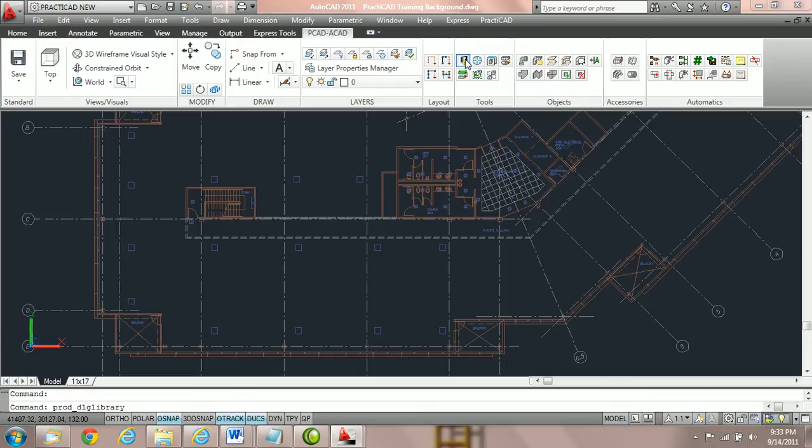Make sure you go into the ductwork options and let's check all the same boxes. For options, we should make sure check in-out attachment is checked. It's recommended that this is always checked. Allow incompatible connectors - it's recommended that this is always unchecked, so currently uncheck it. For duct line placement, it's recommended to have everything checked as we do here.

Size read only is up to you. To start, let's put our duct line editing options on change duct to transition, keep duct size at turn. I've got keep duct size at transition unchecked, and very important, specification by geometry is checked. Though the first three are preferences, this one I think should be checked all the time.

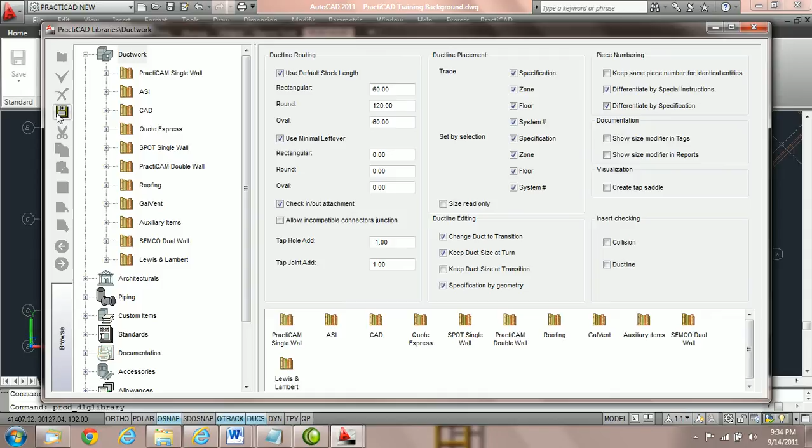Once you've got everything all together, if you've made any changes, you'll see the save key pop up. Click save and then exit out of your library.

Now we're going to zoom into this section of the drawing, and let's focus on this quadrant right here.

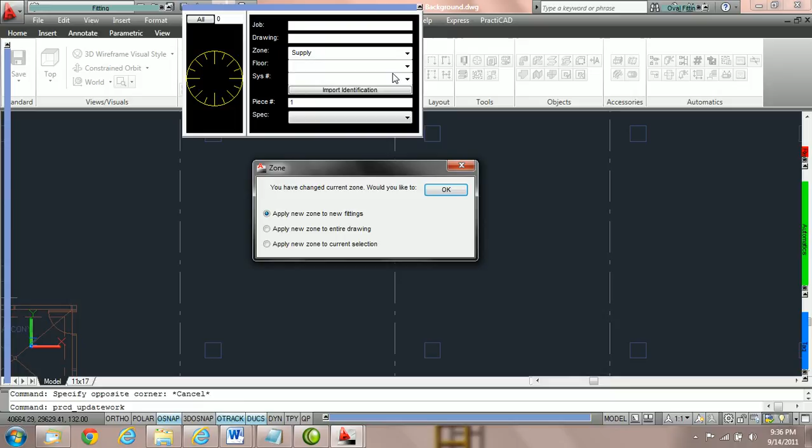Now first go into your workbox and choose a zone. We're going to choose a zone supply, and then we're going to choose a specification. I'm going to choose 2-inch water gauge. Remember that your specifications and zones might be different than that of this tutorial. So as long as you have 2 in the drop down menu, you should be fine.

For this exercise, I'm going to grab 2-inch water gauge and say apply to new fittings.

Now we need to go into the fitting box and grab a piece of rectangular duct. You should see the specifications, if you have them, already applied. We're going to go into Width In and choose 48 by 24, and then let's give it a height, 10-foot bottom, and hit enter.

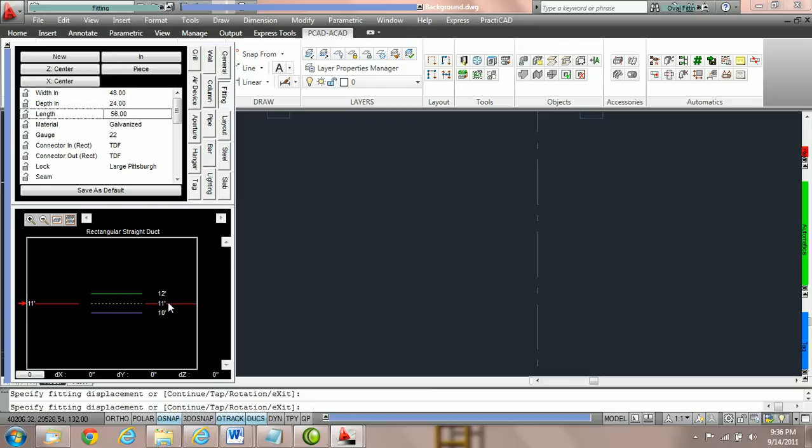Now we're going to place the duct on the drawing. Click once to start your rotation. Might help to have polar on. I'm going to turn polar tracking on. Click a second time to accept rotation, and then you should see the routing methods. The last thing you see before you're one click away are the routing methods.

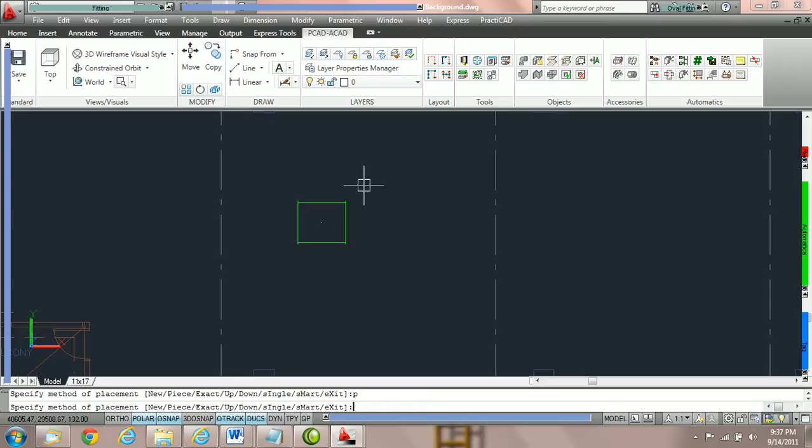So I'm going to click one more time. I'm currently routing with piece to put one piece on the drawing. So you could also hit P, spacebar to route with piece, and then click once, and your fitting should be on the drawing.

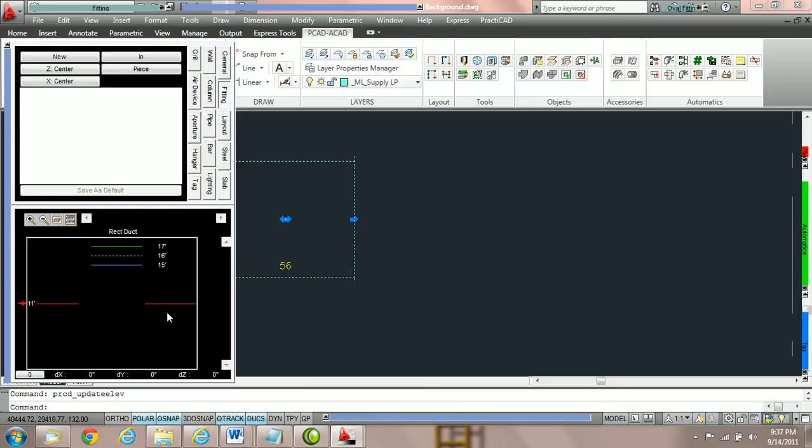Now first, to change the elevation of the entity, what we're going to do is just click on the entity, go over to your elevation box, and just change it to 15 foot, hit enter, and you would have successfully changed the elevation of that one entity.

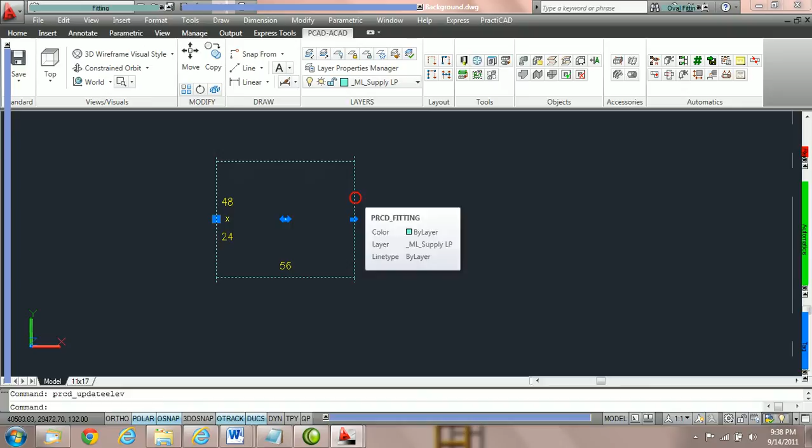Now we're going to edit the duct in 2 ways. We can either do it from the edit fitting window, or we can do it from the AutoCAD property box. So let's do it from the AutoCAD property box. To start, either double click on your fitting - I'm going to do that now - or you can right click and go to properties, and that'll open up your AutoCAD property box.

Here, let's just change the geometry parameter. Change the width in to 36 and the depth in to 18.

Now what we're going to do is go over to the fitting, and we're going to make changes to the connectors, but let's do this using the edit fitting option. Right click on the fitting after it's selected and go to your edit fitting option and check it. A little window should open up.

I'm going to put my fitting in Southwest isometric view by clicking right here. And you should have all your parameters unlocked.

Let's take the connector out and switch it from TDF to slip and drive. On my computer it says S&D. Your data might be different, but let's just change the connector out to slip and drive.

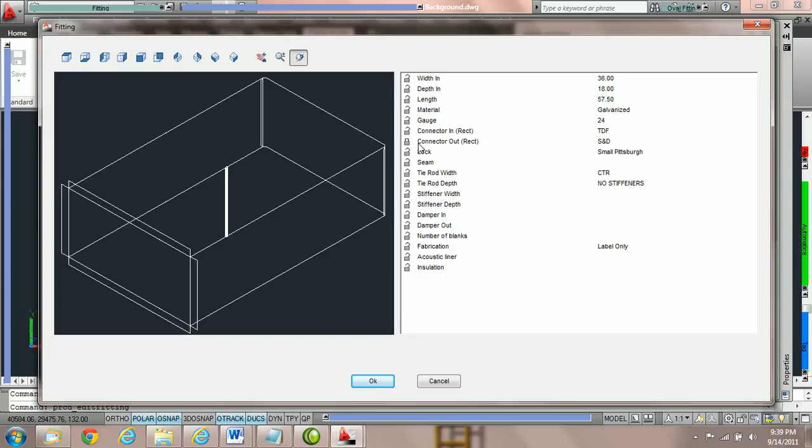And let's lock down that parameter, just that one parameter. And once you've done that, let's press OK.

Now, go into your AutoCAD property box and try to change that connector from S&D back to what it was. I'm going to try to change it back to TDF. If you do it, you should see that it is impossible to change that connection.

If we want to change that connection now, we need to go back into Edit Fitting. So once you've tried to change it and you've been unsuccessful, let's right-click on that fitting again and go into Edit Fitting.

And then let's click on that connector, the connector out, and change it back to TDF or whatever connector you had it at first. And then press OK.

As you can see, editing the fitting is very easy. Locking connections is also a very useful and easy feature to use. An area you might want to use edit fitting would be if you need to change a connection for some reason and you think you might edit the fitting later and you don't want that connection to change back.

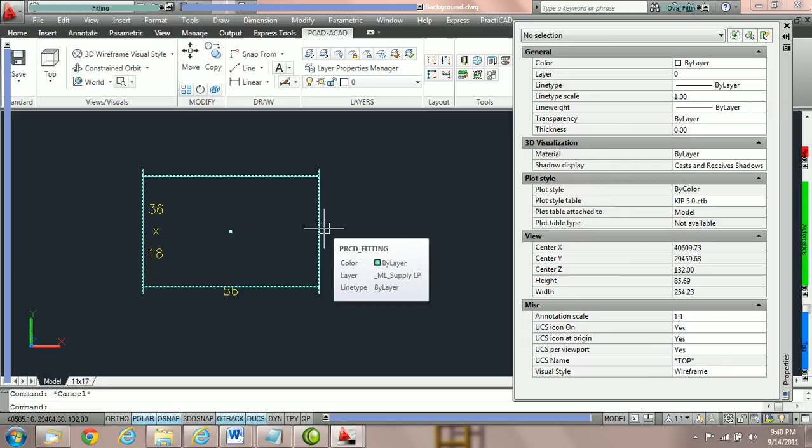For example, let's go through an exercise where we're going to grab another piece of rectangular duct out of your fitting bin and then hit C spacebar for continue and place it on the drawing by clicking once, and then I'm going to hit escape to let go of the fitting.

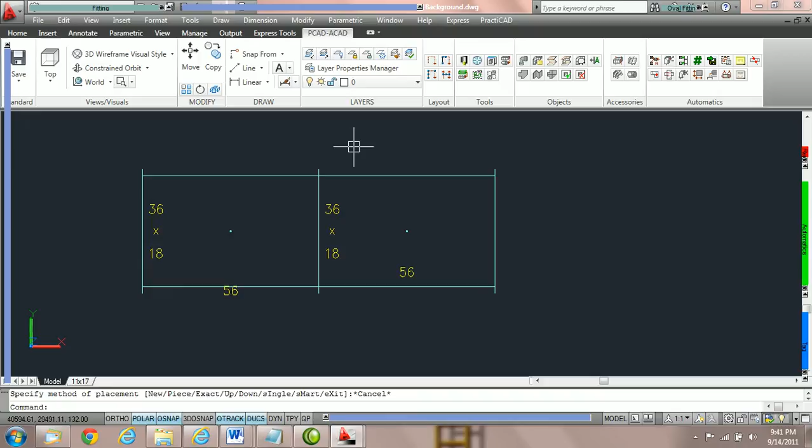Now let's click on the first fitting and double click for the AutoCAD property box. Change the connection out to slip and drive, or some connector that you've got in your data. Once you do that, you should see that PractiCAD will change the other connector to match.

This is all about compatible connectors, and there are separate tutorials on that, as well as the option that doesn't allow us to attach connectors that are not compatible. So that's why we changed that for this exercise.

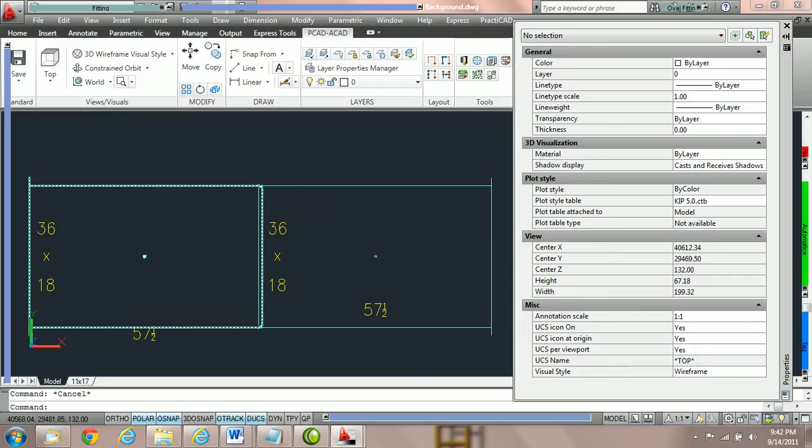Now, if we knew that we would want to hold these connections to slip and drive, even if we go to edit the duct later, we'd want to lock down these parameters. Currently, click on the first duct on the left and change the parameter to 42 and hit enter.

When you do that, notice that PractiCAD has now reapplied the specifications that are active, and it's probably added a TDF connector back onto your fitting.

So what we're going to do is reapply specifications, but with the connector locked. Change that connector on the out back to slip and drive.

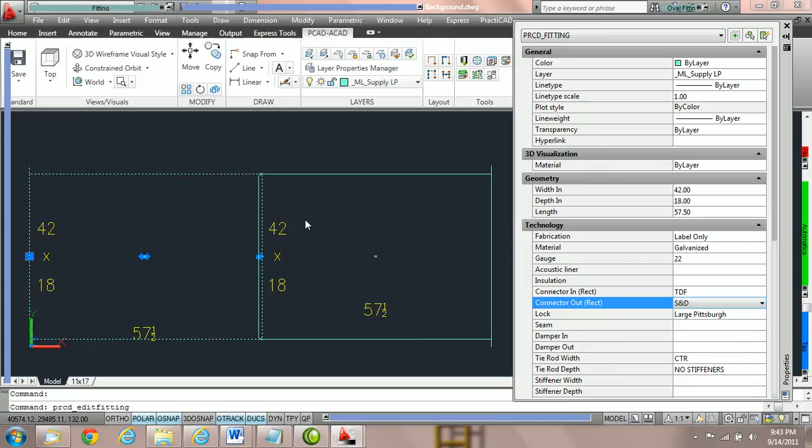Once you've done that, right click on that fitting and go to edit fitting. Let's lock the connector out down. And then press OK.

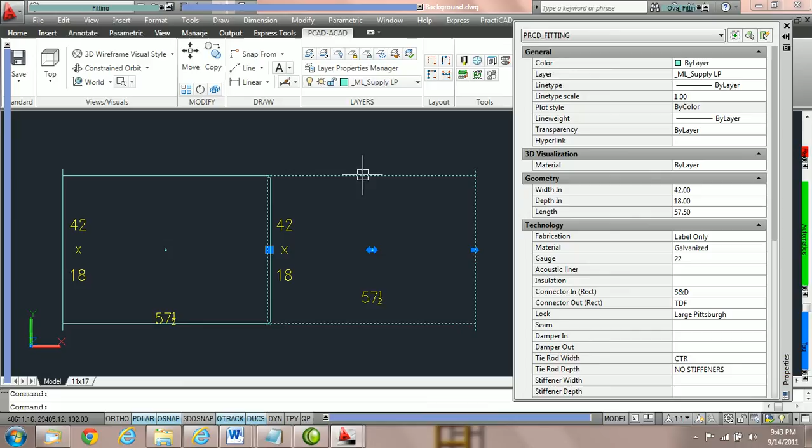Hit escape to let go of the first fitting. Then click on the second fitting, right click, and go to edit fitting. Lock the connector in of that particular connector, so it's locked down to slip and drive. And press OK.

Now you're going to click on both fittings. Before we edit anything here, I want to point out something that's very important.

PractiCAD and AutoCAD both will only show you properties of identical items. It can show identical items that have different parameters, and you'll still see the list as you see here.

For example, we have two fittings. They are identical in that they're both rectangular duct fittings, so the entities are identical. You can see that all the properties they have in common, that are identical, show up in the property box. However, the connector in and connector out are different for each one.

So whenever you've got two like items highlighted with properties that are different, PractiCAD shows the word varies. That's always an indicator that these properties are different. And you can globally edit in this section if you're highlighting two identical items.

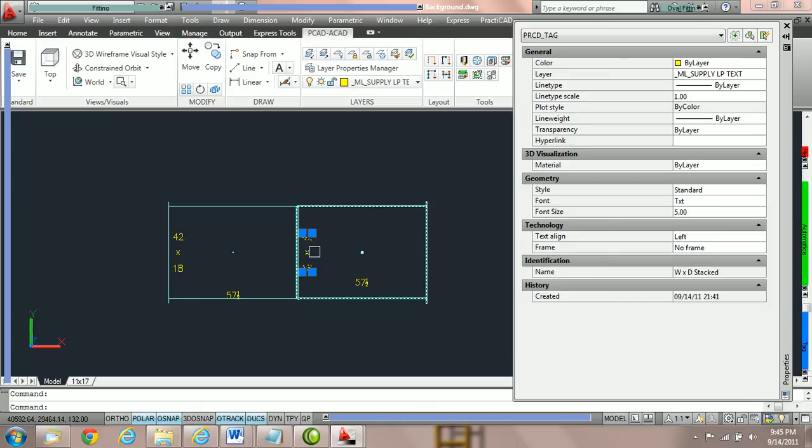However, if you're highlighting two different items, for example a tag and a piece of duct, these are two different entities. You can see that in the AutoCAD box it says all two, and notice that we don't have properties at all, because the property box will only show us the properties for one entity at a time. So if we want to edit the duct, we have to make sure just the duct is highlighted.

However, we can have two pieces of duct highlighted, and if they have parameters that are the same, it will show the property box. But if the parameter values are not the same, it's going to say the word varies. So it's an important note.

Once you've got two fittings highlighted again, let's go back to our specification table and change the spec. I'm going to say 6-inch water gauge and say apply new spec to current selection. And we're going to press OK.

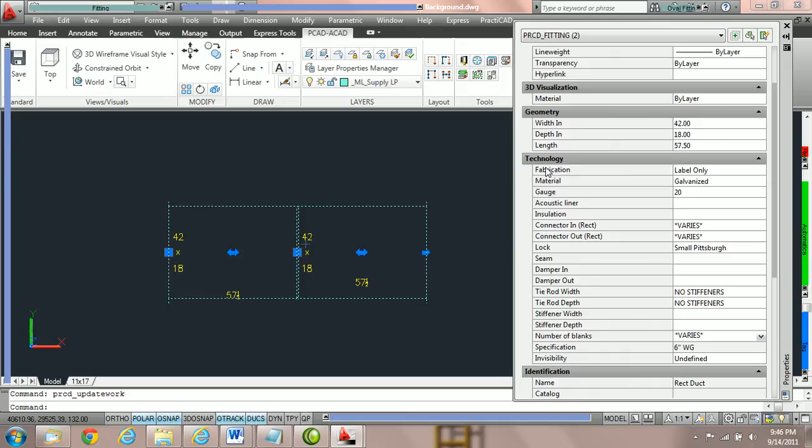Once you do that, pay attention to the change. You should notice that nothing should change, because the connection should stay the same since we locked those connections down. However, you can see by going into the workbox that we have changed the specification, and by going into technology parameters that the specification is 6-inch water gauge.

So let's do the same thing, but let's undo those connections. Let's right click and edit fitting on both. Connector out, we're going to unlock, and press OK.

And then we're going to click on this, right click, edit fitting, and change it. Notice that I can only use the edit fitting for one item at a time. Now we're going to highlight the duct again.

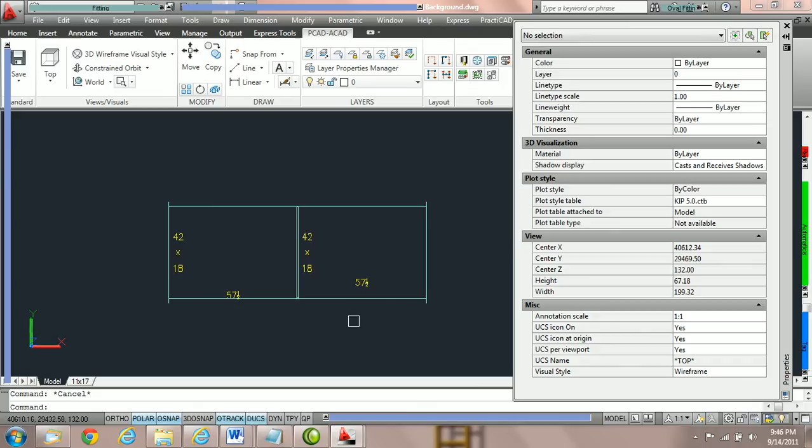Let's go back to the specification, and I'm going to go back to 2-inch water gauge and say apply to current selection, OK. And you can see it's added those connections and edited them back to where they are.

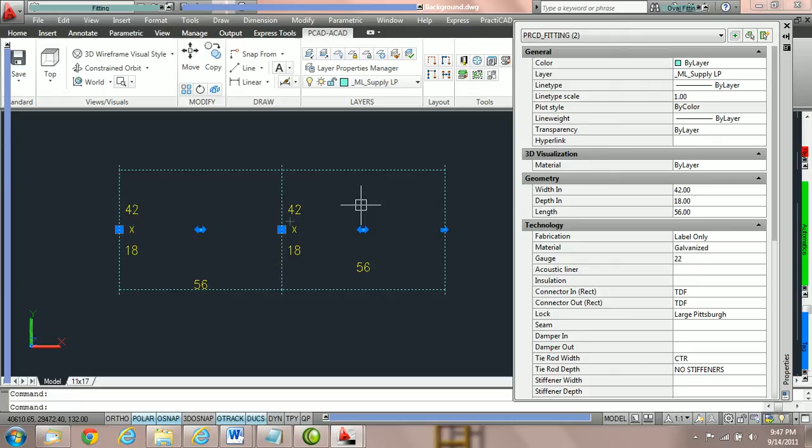Once we've done that and gotten used to the exercise using the locks and editing through the properties box and the elevation and edit fitting window, let's go over the fabrication level. Just delete one piece of duct.

Then double click on it and make sure you've got the AutoCAD property box open. Take note of the fabrication level stating that it's label only. If it's label only, you should notice when you go to change the connector to slip and drive, it should adjust the length as it's done here in this exercise on my screen.

I'm now going to change the connector out to slip and drive as well, and notice that it changes the length to 59. Whenever you're in label only, it should always adjust the finished length to match the connectors.

Notice if you now go into length, change it to 48 and hit enter, you should see the fabrication level switch to cut and label. That's because this piece is no longer going to fit the coil line - it's no longer a stock size fitting. So now it's going to go to the plasma cutter, and therefore it's going to say cut and label.

If you switch this back, and change it back to label only right now, you'll notice the fitting goes back to a full size fitting that's going to match the default stock options you have in your ductwork options in my library. And there are tutorials on that.